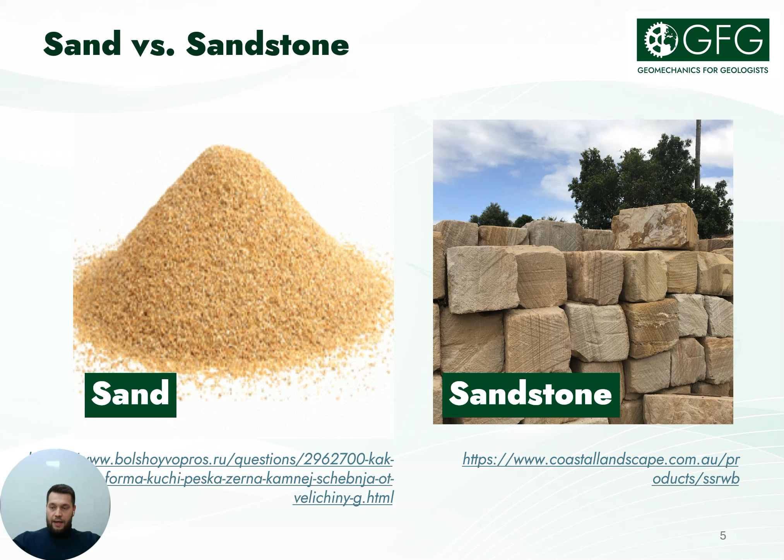Sand and sandstone are two very different things. Sand is loose granular material made up of tiny particles of rocks. The sandstone is a much harder and more durable rock that is formed from layers of sand that have been compacted and cemented over geological time.

One of the key differences between sand and sandstone is their physical properties. Sand has a relatively low density and low compressive strength. Sand is also highly porous, which means it could hold a large amount of water. In contrast, sandstone is a much harder and more durable rock. It has a higher density and a higher compressive strength than sand. Sandstone is also less porous than sand and can hold less water. Its interlocking texture and cementing materials make sandstone resistant to erosion and weathering.

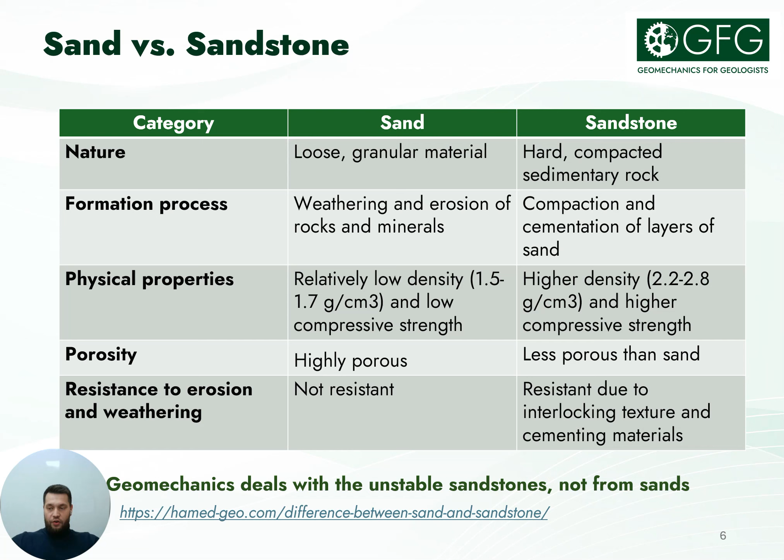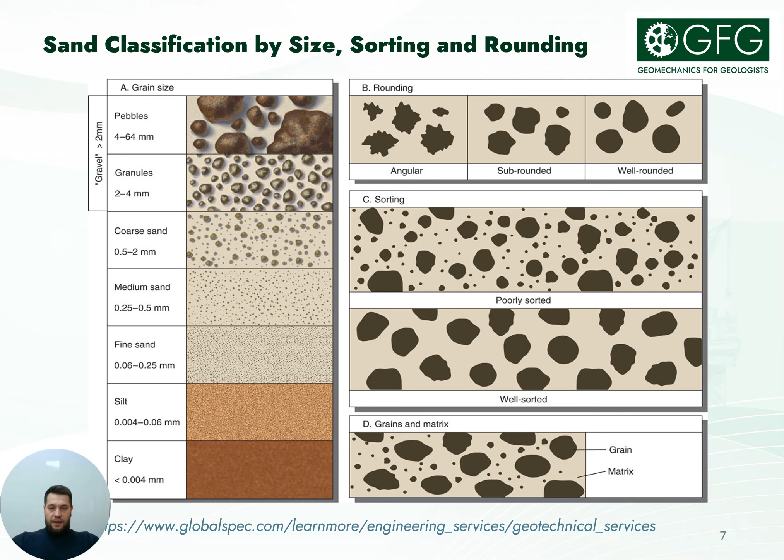The geomechanics deals with the unstable sandstones, not from sands. The sand and sandstones share some similarities in terms of their composition, and let's consider sand classification by size, sorting, and rounding. The classification by grain size can be divided into clays, silts, fine sands, medium sands, coarse sands, granules, and pebbles. As for rounding, we can divide this classification into angular, sub-rounded, and well-rounded sands. As for sorting, we can see the poorly sorted and well-sorted.

The strength range of sand and sandstones is very different. The strength can vary from 0 to tens and hundreds of megapascals.

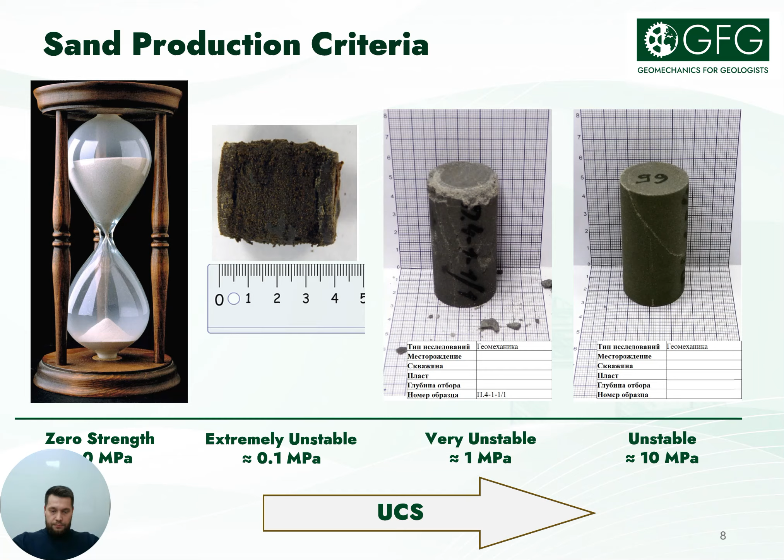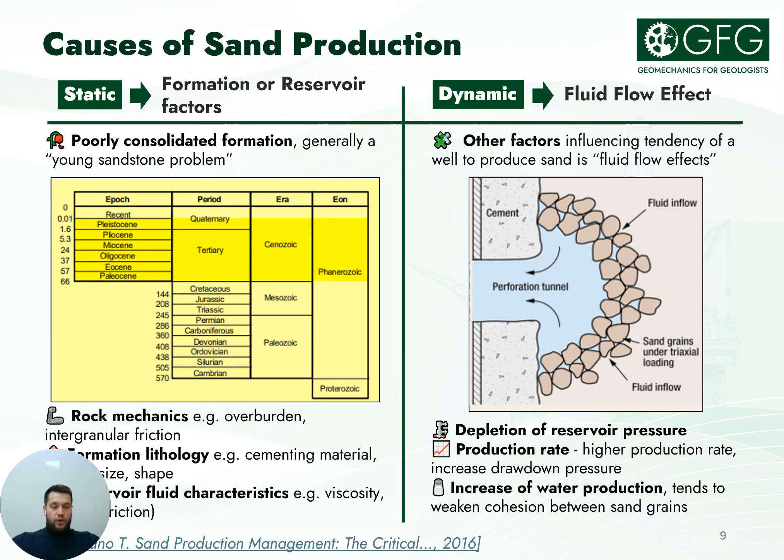Let's take a closer look at the water weakening effect. This effect is related to the fact that water flooding or deformation leads to a decrease in rock strength. To date, many mechanisms have been proposed to explain the water-induced strength reduction, such as fracture energy reduction, chemical and physical deterioration, pore pressure increase, capillary tension decrease, and frictional reduction.

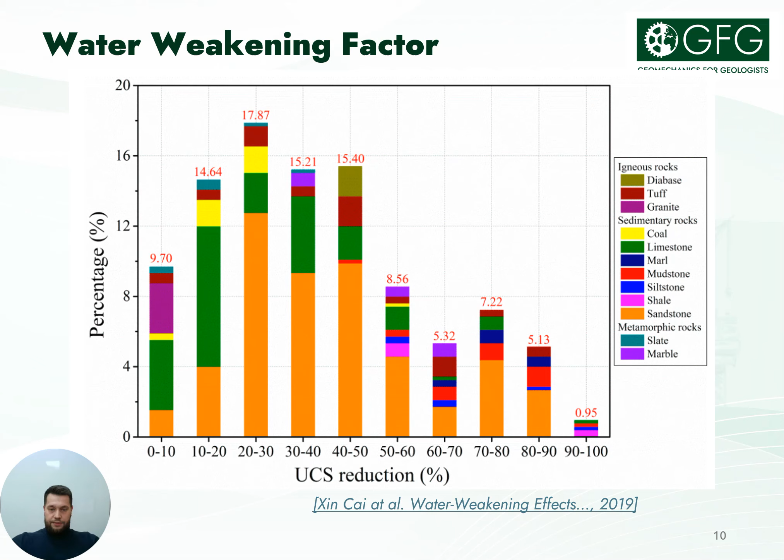Several mechanisms may act concurrently to control the deformation of wet rocks. However, none of these mechanisms can be uniquely determined for the great variety of rock types, but some are likely more significant than others for certain rock types and test conditions. The graphs show that water saturated samples, blue column, have a lower strength than rocks with natural saturation, red columns.

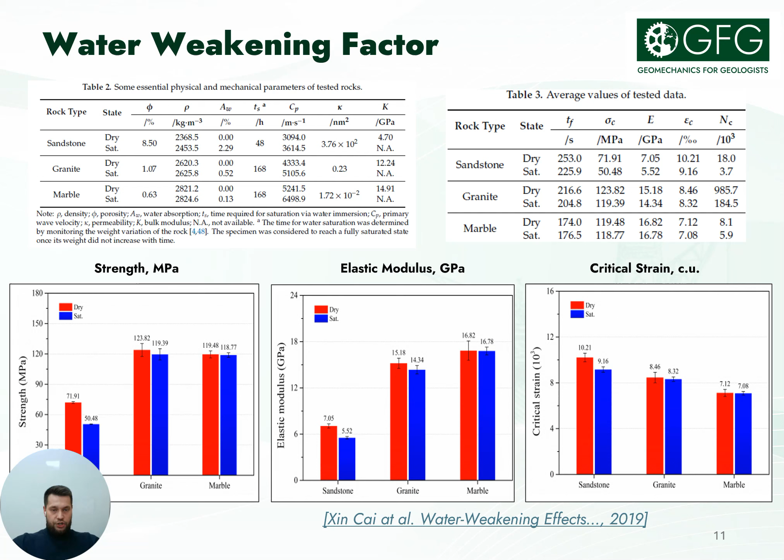Let's consider the study in which the natural and saturated weakly cemented Cretaceous sandstones were used to carry out Brazilian test and UCS test. Acoustic emissions characteristics were also monitored simultaneously. The main conclusions from this research are as follows.

Second, the acoustic emission energy corresponded well with the load-time curve, and the failure of the samples was accompanied by the release of a large amount of acoustic emission energy. In saturated sandstone, water destroys the cementation between mineral particles, initiates microcracks in the sample, and reduces the cumulative acoustic emission energy. Also, the distribution range of the acoustic emission peak frequency in natural sandstone was wider than that in the saturated sandstone.

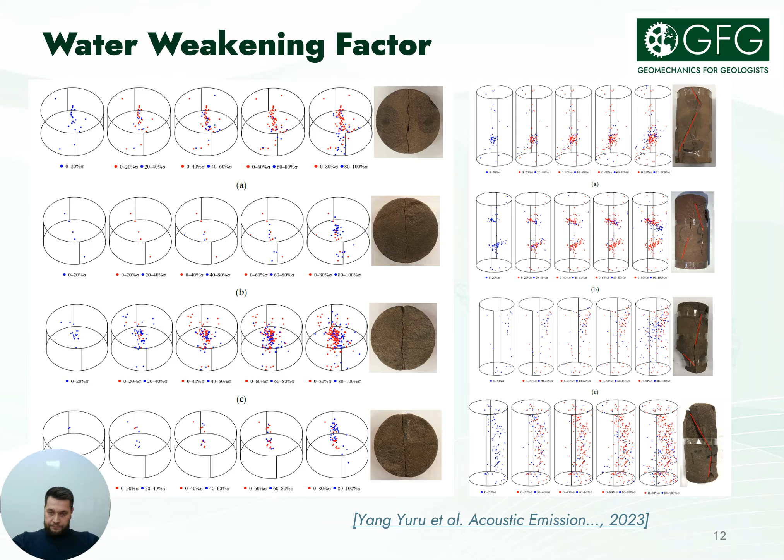Let's consider part number 2, that calls sand production models.

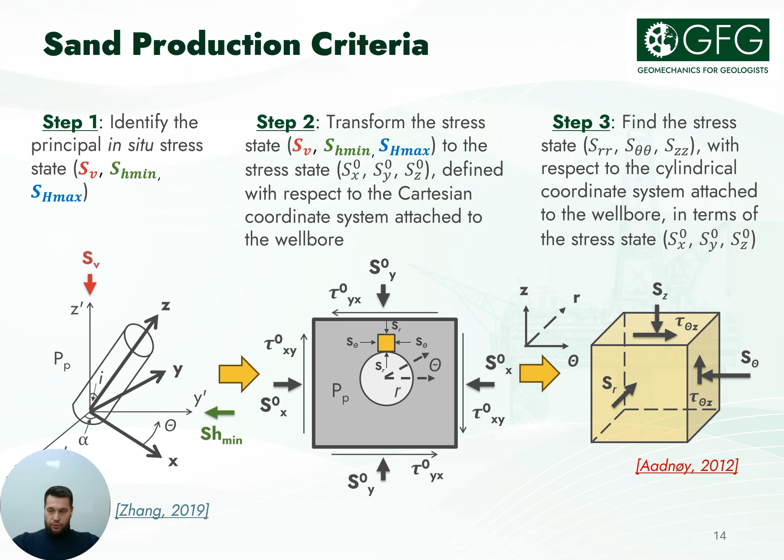The hole possesses inner and outer radius so large compared to inner that they can be deemed infinite. So step number 1 is identification of principal in-situ stress state. Step number 2 is defining stress state with respect to the Cartesian coordinate system attached to the wellbore. At last, step number 3 is finding the stress state with respect to the cylindrical coordinate system.

If we write down the Mohr-Coulomb failure criterion and express it in an inequality relation to the strengths of TWC or UCS, we can obtain the following inequality, where S_if is a function of borehole stresses, elastic properties, and strength properties.

If we write the distribution of S_if as a sinusoid around the wellbore, then in places where S_if exceeds the strength, the breakouts will be formed. In our case, this is sand production or sand removal.

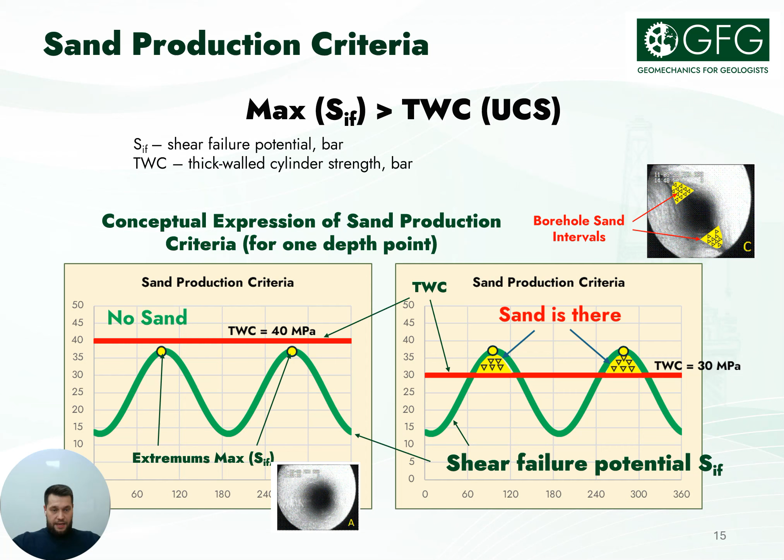The thick-walled cylinder, TWC, method is used to predict sand production. The experiment consists of the following stages. First, sample preparation: a sample with a diameter of 30 mm, a length of 60 mm, and an internal hole with a diameter of 10 mm is drilled.

Second, the sample is saturated with a model of formation water under vacuum. The sample is installed between stops, sensors are fixed to monitor axial and radial deformation, then placed in a high pressure chamber filled with compression fluid.

The study is carried out at room temperature. The pore line is brought out to the atmosphere without pore pressure control. As for the compression pressure, the test is carried out under hydro-compression conditions. The effective compression and axial pressure is set as 10 atmospheres. During testing, continuous recording of confining pressure, axial load, radial and axial deformation is performed.

Axial pressure and confining pressure are applied to the sample, load rate near 0.5 MPa per minute, until the sample is crushed. The failure point is registered. At the end of the test, the confining pressure is switched off. The sample is removed from the chamber and photographed.

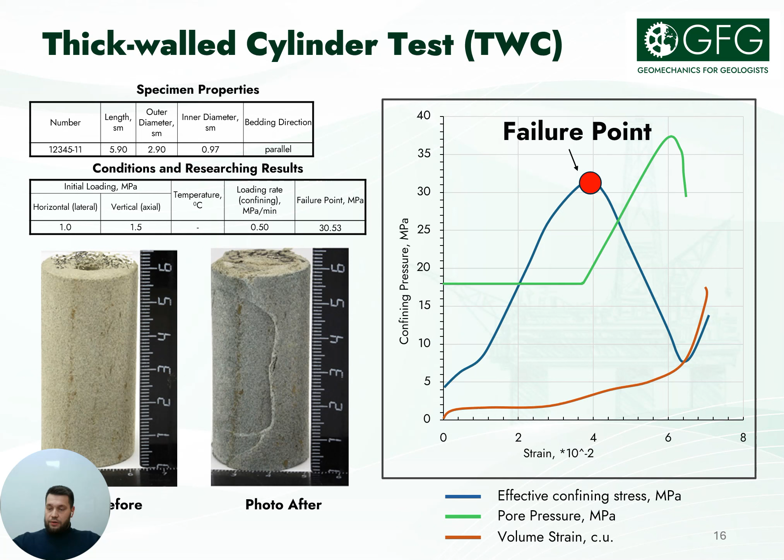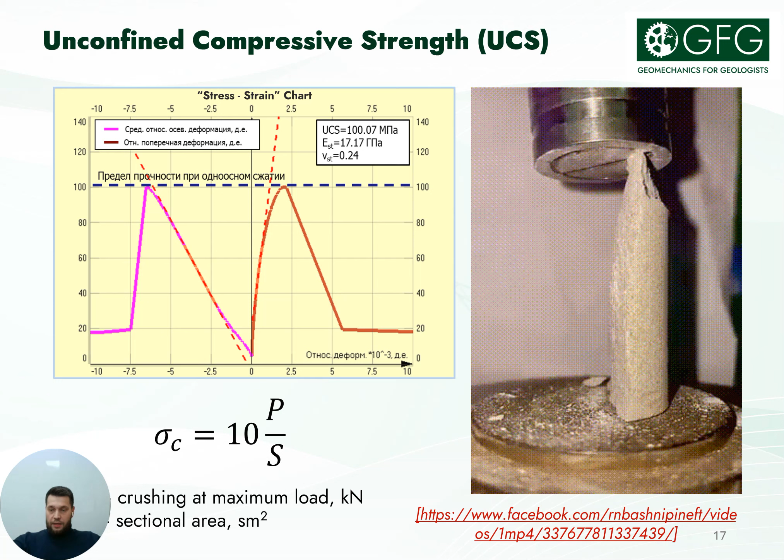The graphs of the change in confining pressure and axial stress over time are plotted, as well as the axial and shear lateral strain from confining pressure. If there are no TWC data, we can use unconfined compressive strength data. We talked about this methodology of conducting UCS in the previous lecture, number 4.

The models of sand production can be analytical and numerical. We will start from analytical models and move on to the numerical models at the end of our presentation today. The most convenient forms of visualization of analytical models are triangles and well sections.

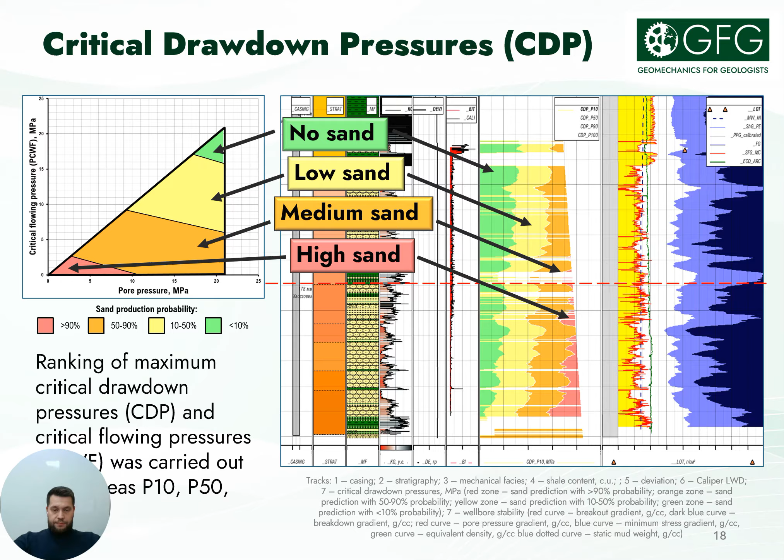Let's start with triangles. The triangle in the figure shows a safe drawdown window, which shows the predicted safe drawdown for a particular combination of completion, rock strength, and initial reservoir pressure and stress condition. The plot of bottom hole flowing pressure versus pore pressure is divided into zones.

The first zone is the zone of no production, above the diagonal line. The second zone is the zone of sand-free production, the green zone. At last is the red zone, where there is sand plus oil production.

With the increase in depletion, the amount of drawdown that we can apply to the completion without failing the rock changes. One of the goals of sand production prediction is to predict the safe drawdown line in the safe drawdown window.

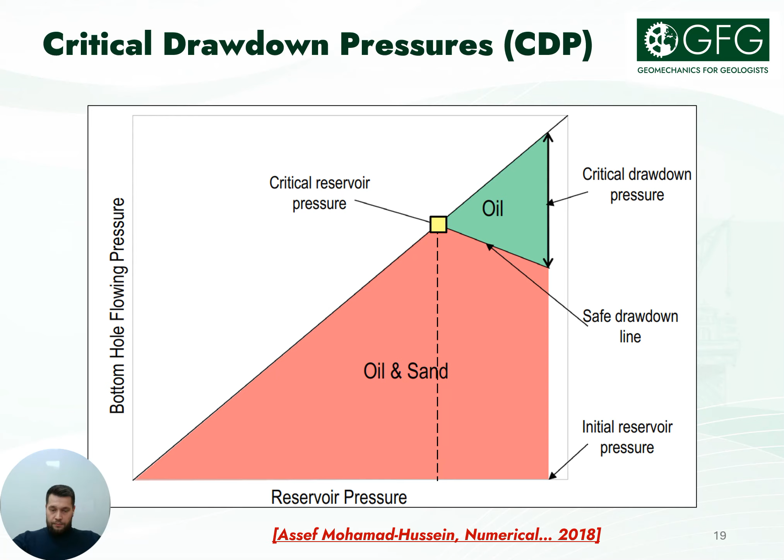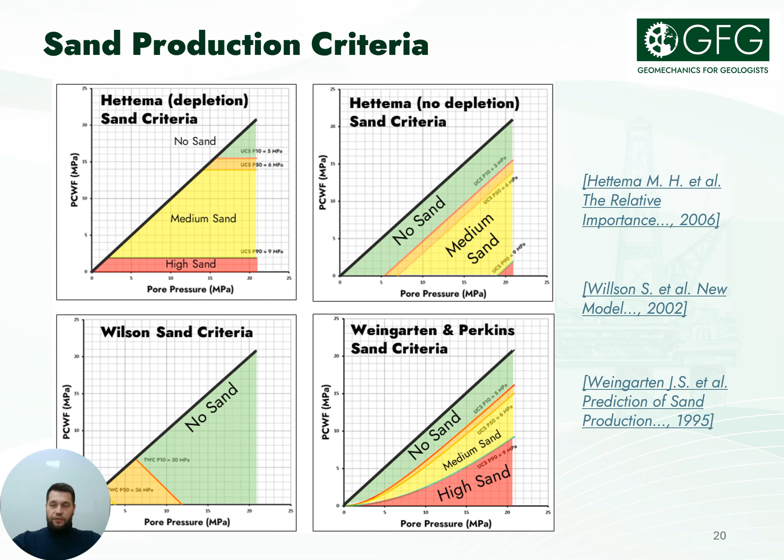There is also a rectangular visualization of the results of interpretation on sand removal. For example, in the FIST shell software, a graph of the relationship between bottom hole drawdown and vertical effective stress is assumed, in which areas of lack of sand, transition zone with an increasing proportion of sand, as well as catastrophic sand removal are marked in different colors, from green to red.

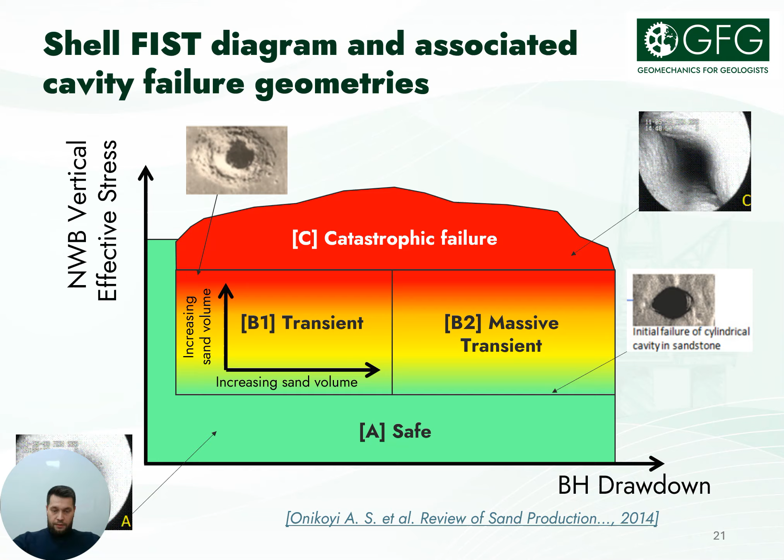On this slide, the following slides will show the evolution of triangles with the Wilson criteria in time. That is, we see how the depletion changed the location of the boundary lines.

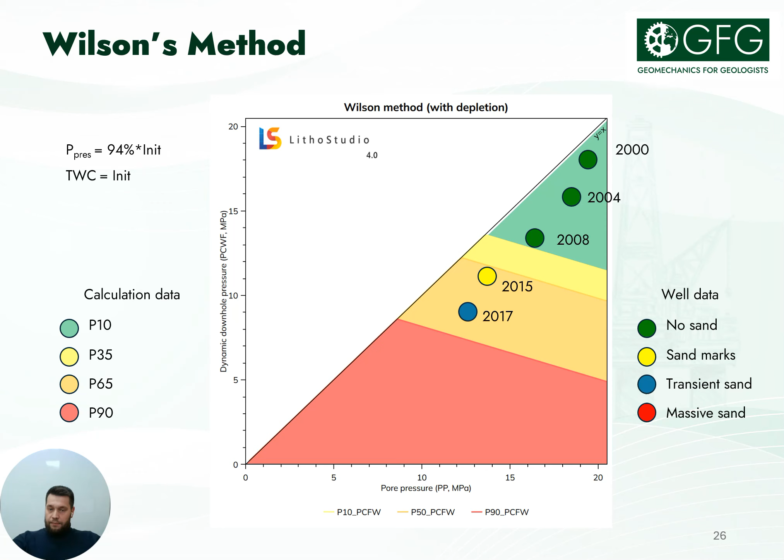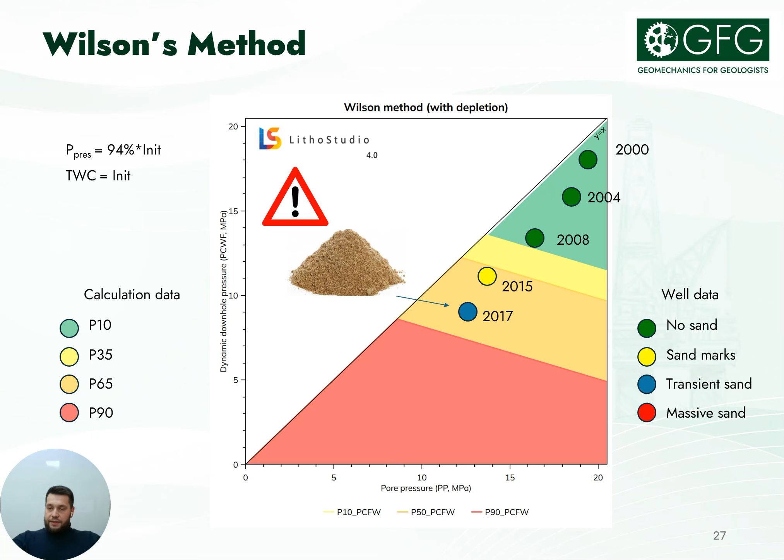Note that already at the third time step, in 2008, the yellow border has moved higher. In 2015, the fourth time step, the point falls into the yellow zone where the first signs of the solid phase in the well begin to appear. And in 2017, points already appear in the orange zone, characterized by an increase in sand removal, which we see during sand monitoring.

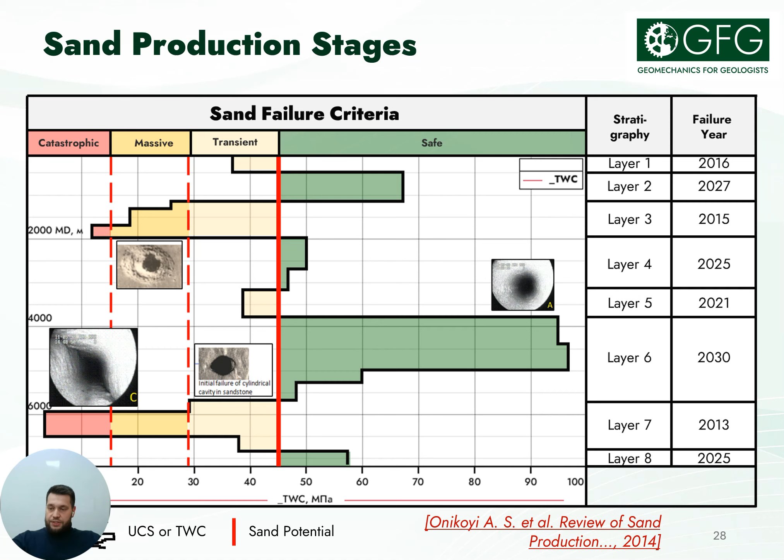Now let's move on to well sections. This is a similar form of visualization of sand production results. On the well section, it's possible to visualize SIF with an overlay of rock strength. Zones where SIF exceeds strength belong to the sand outflow zone and are highlighted in red. When SIF doesn't reach strength, sand removal is not observed; this is the green zone. The right side shows the stratigraphic layers and the year when sand removal will begin.

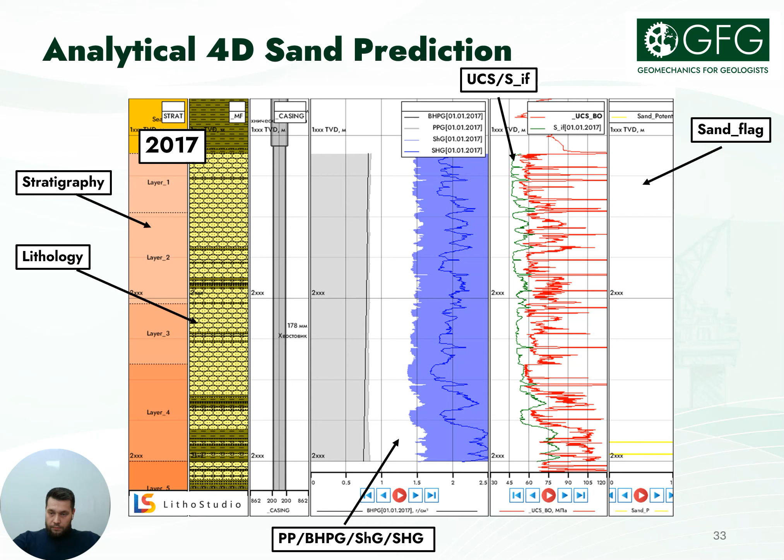For example, this. Thus, the degree of sand production increases with the subsidence of pore pressure in the well.

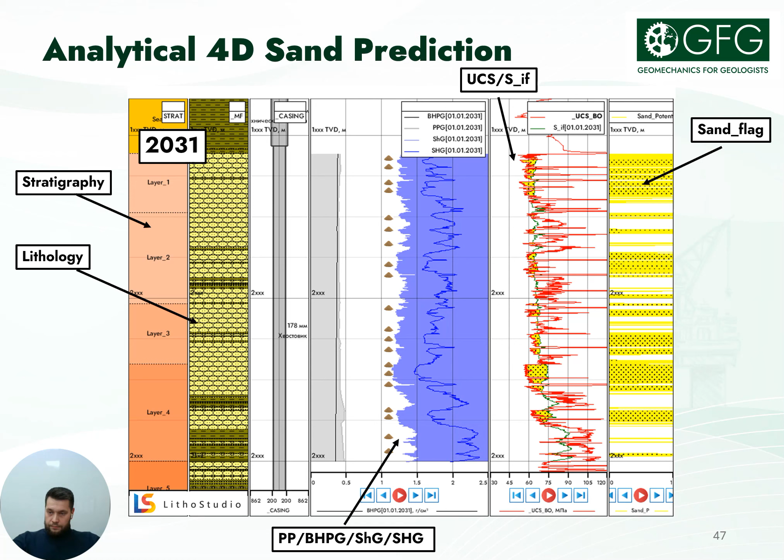The calculation is software-based and relies on data arrays consisting of curves of the same type but having different time steps loaded into the program. Pore pressure and bottom hole pressure data loading allow minimum and maximum horizontal stress arrays to be updated. The updated minimum and maximum horizontal stress arrays, as well as the original pore pressure and bottom hole pressure arrays, are used to calculate the maximum allowable bottom hole pressure, critical drawdown pressure, SIF parameter, and sand removal flag.

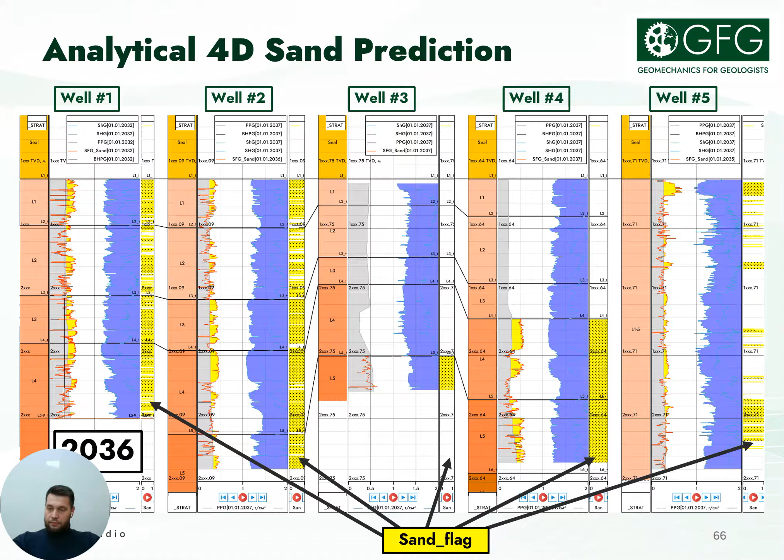Here is an example of the results of the sand analysis for several wells for different formations. The cell shows the month and year of the expected onset of sand production.

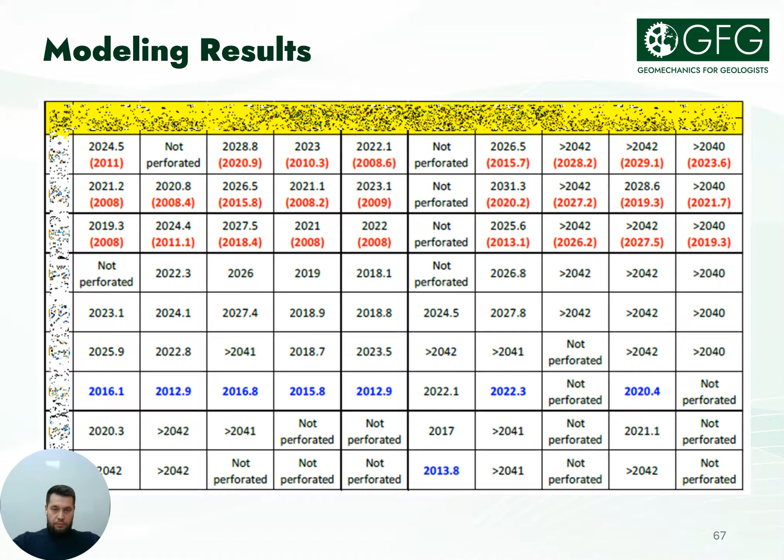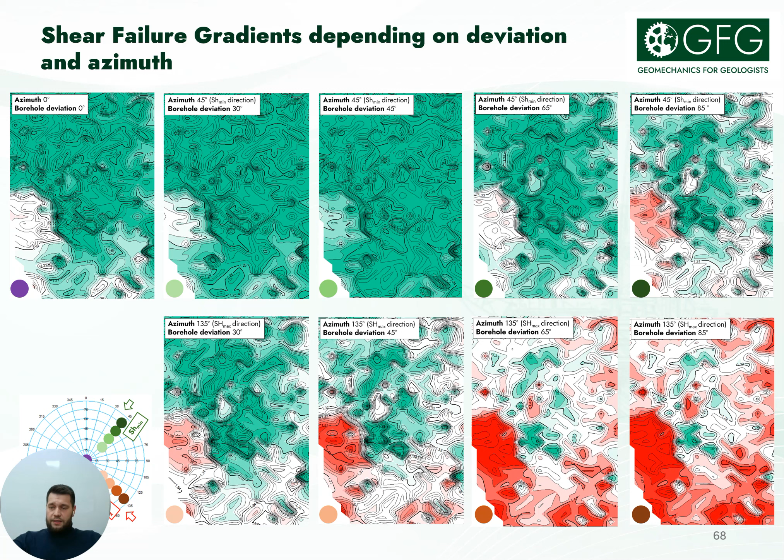Since the maximum bottom hole pressure is a function of the well trajectory, it's possible to build maps of the maximum allowable bottom hole pressure for different trajectories. On this slide we can see 9 maps of the maximum allowable bottom hole pressure built for 9 well trajectories. The highest values are typical for wells drilled in the SH max azimuth, while the lowest values are typical for vertical wells and wells drilled in the SH min direction.

It's also necessary to assess which parameters have the greatest impact on the maximum allowable bottom hole pressure. As we consider a normally faulting regime, we can say that the maximum effect is from horizontal stress. As for horizontal and inclined wells, we can see the maximum influence is from the overburden gradient.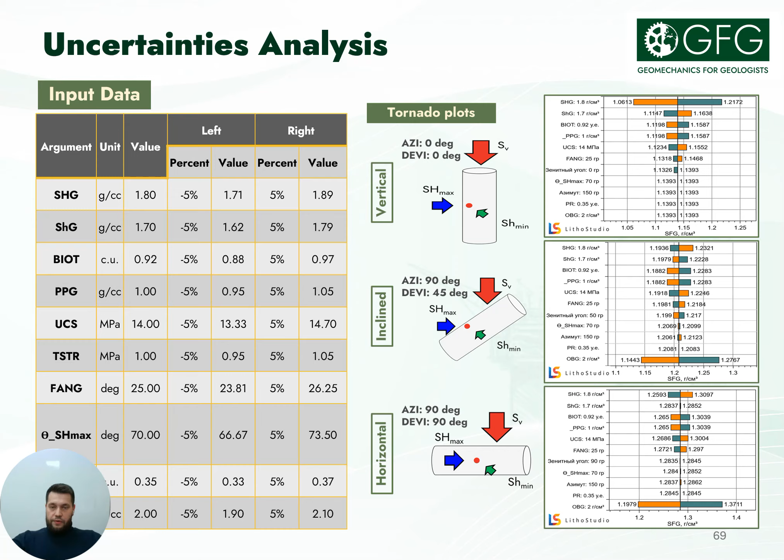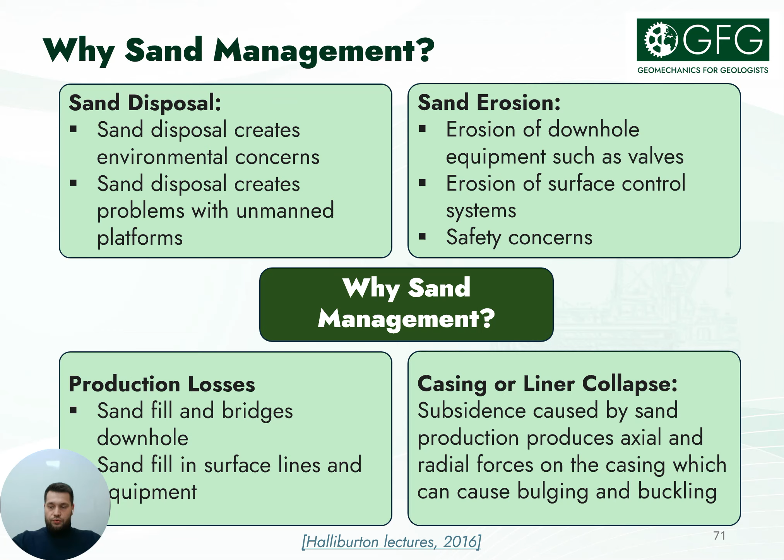Let's consider part number 3, sand production management. Why is sand management important? Firstly, the disposal of removed sand is a technical and environmental problem. Secondly, the erosion of equipment caused by sand removal leads to premature destruction and failure of well completion elements, significantly increasing the cost of development and operation of the field. Thirdly, the removal of sand leads to a decrease in the production of the main product, oil and gas.

With real-time knowledge of the wells' sanding tendencies, the operator is able to optimize well test results through efficient operation of surface equipment by mitigating potential threats of erosion, sand deposition, and environmental hazards.

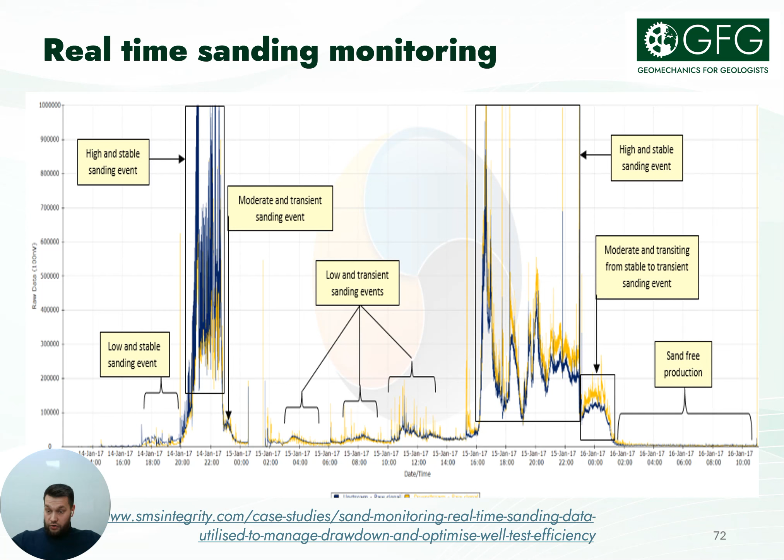The sand production in the wells can also be recorded using sand logging.

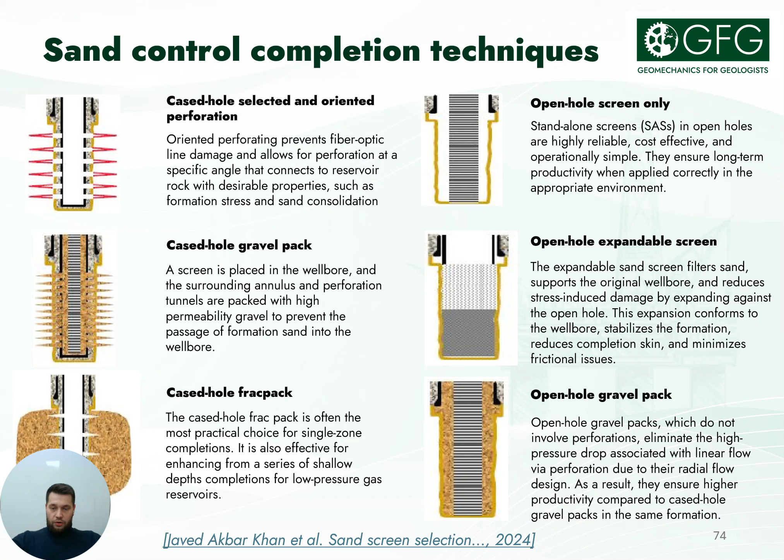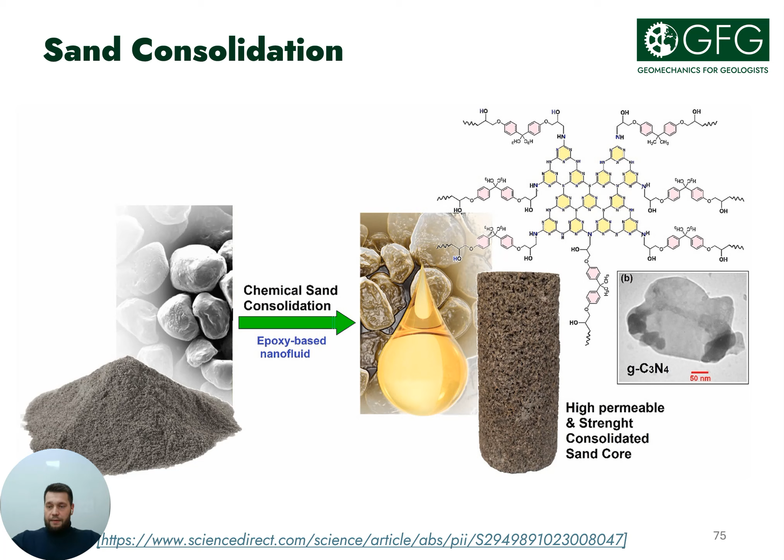Another method is chemical sand consolidation. As shown on this slide, the mixture of a chemical agent and sand grains allows you to consolidate the rocks, increase its strength, and thereby reduce the risk of producing this sand during mining.

Another effective method of sand control is selective perforation. Let's take a closer look at this mechanism. Fracture initiation can occur at different points around the wellbore if the perforations aren't aligned with the preferred fracture plane or the maximum horizontal stress. This misalignment can create complex flow paths, leading to increased formation breakdown and fluid friction pressures during hydraulic fracturing treatments.

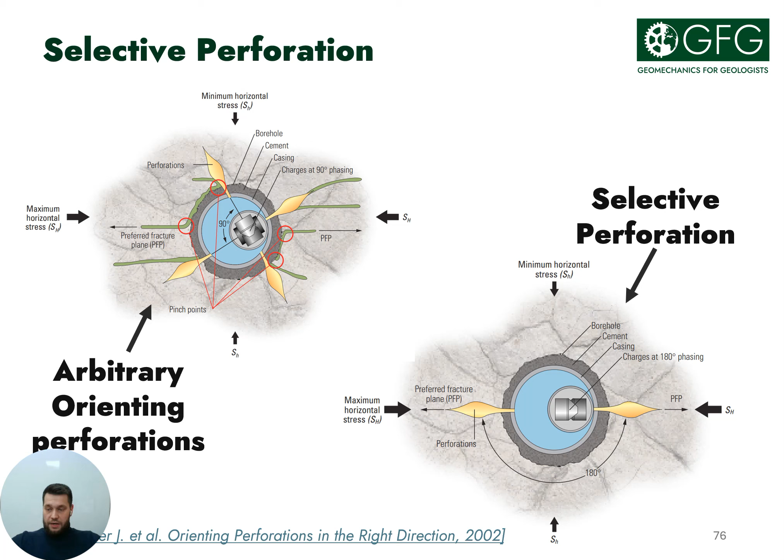When perforations are positioned near the preferred fracture plane, essentially the path of least resistance, they help minimize or eliminate restrictions near the wellbore. To optimize stimulation, achieve oriented fracturing, and lower the risk of sand production, it's crucial that perforations are properly aligned and perpendicular to the minimum horizontal stress.

Now let's look at the numerical model of sand production. It works on the basis of a system of equations derived by Geilikman in 2006. This equation allows us to calculate the flow rate of liquid with sand and the flow rate of the sand itself as a function of time. Thus, it's possible to carry out not only qualitative assessment of sand production, but also quantitative.

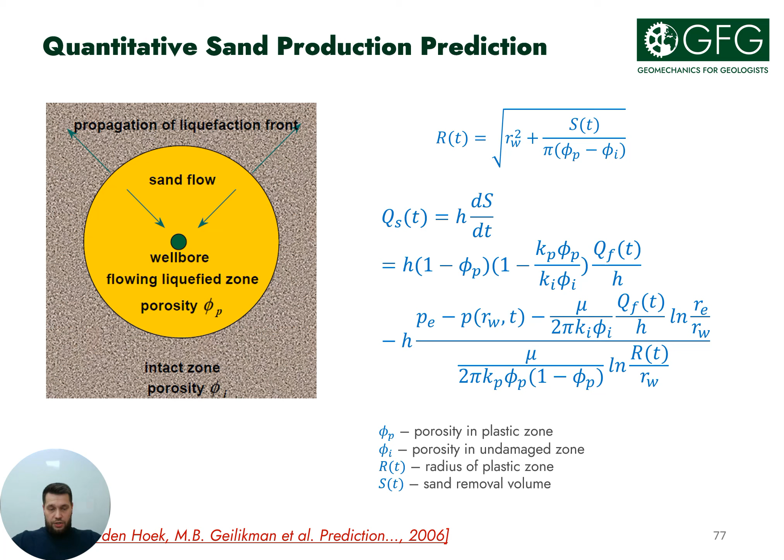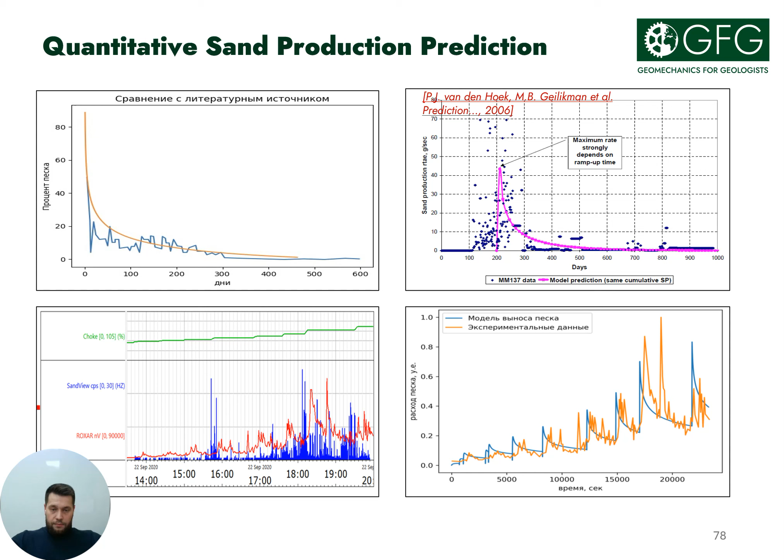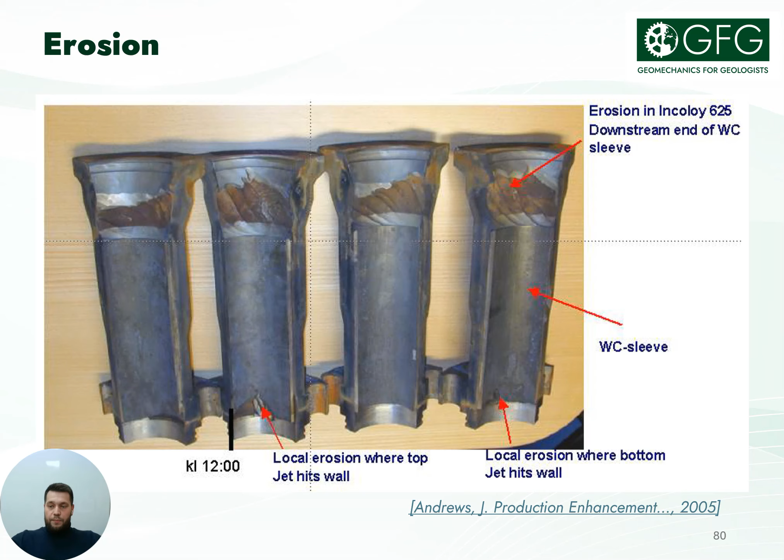Sand erosion is a major problem in many production situations because small amounts of sand in the produced fluid can result in significant erosion damage. It also causes localized erosion damage to protective corrosion scales in pipe walls and results in accelerated erosion-corrosion damage.

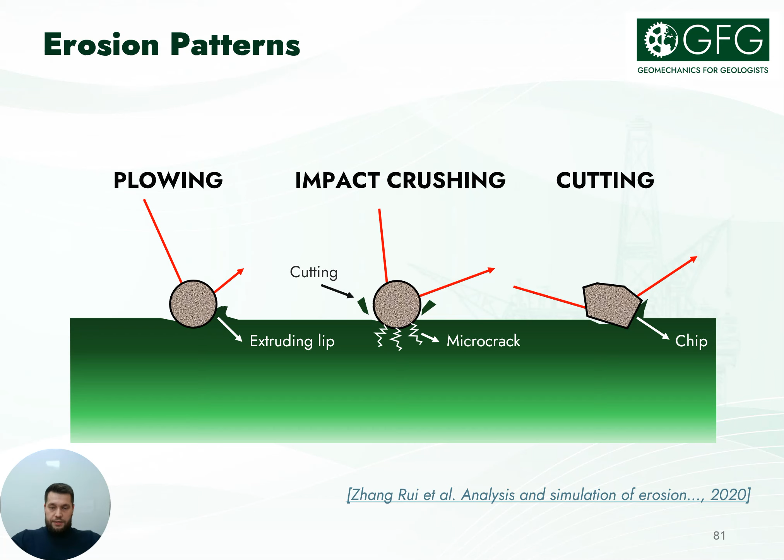The interaction of sand particles with the surface of the equipment can be expressed as three types: plowing, impact crushing, and cutting. The objective of Shirazi's work, which I'm demonstrating on this slide, was to develop guidelines for predicting threshold velocity and particle size below which only a small amount of erosion occurs.

Threshold velocity guidelines can help estimate safe production velocities in erosive services and serve as a tool for engineers for cost-effective design of piping systems for new wells.

Recent methods for predicting threshold velocities in producing wells are based on penetration rate in elbow geometry sections, because this geometry is more susceptible to erosion damage than a straight pipe section.

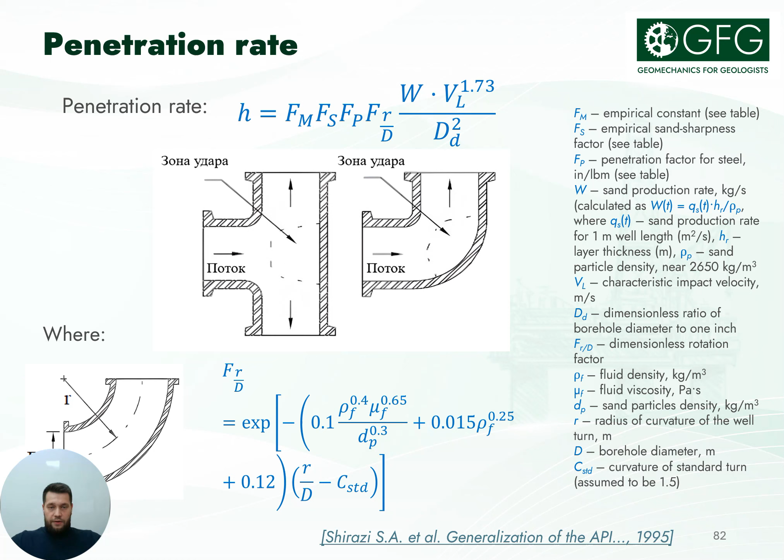In Shirazi's work, a formula is proposed for computing penetration rate for various pipe geometries that contains the following expression for computing the maximum penetration rate in elbows for carbon steel materials. It depends on many factors, including pipe geometry, size, sand size, density, flow regime, velocity, and fluid properties.

The characteristic impact velocity of the particle is obtained by creating a simple model for pipe geometry. This is done by relating the erosion rates of complex geometry to erosion occurring in a direct or normal situation.

The impact velocity of sand particles with a pipe wall is a strong function of pipe fitting geometry, fluid properties, and sand properties, as well as the amount of fluid through which the particle must travel to strike the pipe wall. A characteristic length, called the equivalent stagnation length L, is used to represent distance in the simpler direct model.

The impact velocity of the particles of sand in the simple model is referred to as the characteristic impact velocity of the particle. A simplified particle tracking model is used to compute the characteristic impact velocity. This model assumes that the particle is traveling through 1D flow, assumed to have a linear velocity in the direction of the particle motion, and uses a simplified drag coefficient model.

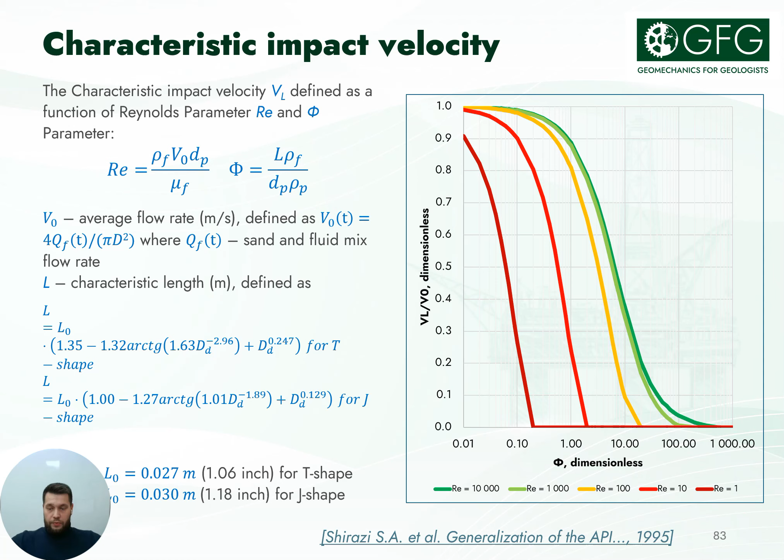The figure shown on this slide shows the results for characteristic impact velocity of the particles with pipe wall as a function of several production parameters. The following are dimensionless groups for parameters: first is the Reynolds parameter and the phi parameter.

This slide shows the constants used in the equations that we have considered above.